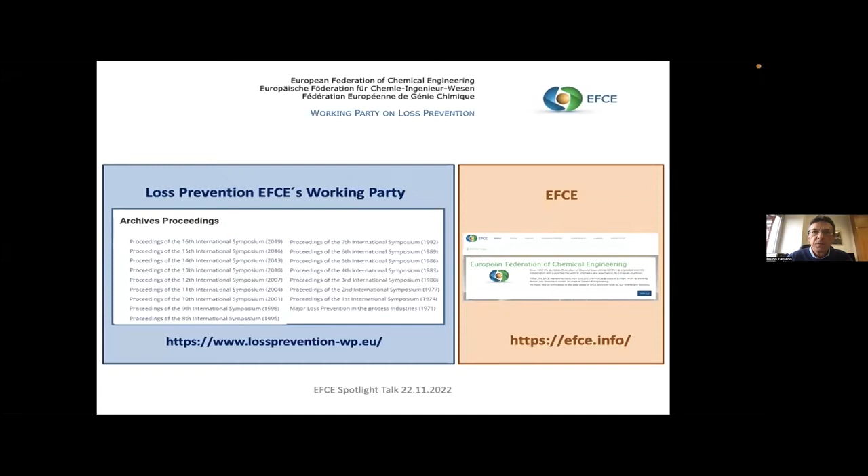Why? Well, first of all, energy is the engine that underpins an economy, and we are going towards an unprecedented energy transformation. This topic represents an emerging facet of the safety and loss prevention domain. And at the last Prague Symposium, which was in June 2022, it was very appealing for delegates as new challenges in our rapidly evolving risk world.

In fact, we all know that we have to face new challenges, and indeed we are in a sort of perfect storm where 3 drivers play a determining role, namely digitalization, climate change, and energy transition. They provide significant opportunities to enhance process safety, but equally they require managing the connected risks. And the last years introduced 2 additional catalyst factors, the COVID pandemic and the Ukraine crisis, which sent shock waves through the sector and are likely to influence how we organize and manage our plants and business to be more resilient and support the deep decarbonization of the global energy system.

Now we can move to our webinar, and here you can see the program of this workshop, which collects worldwide international experts from academia, industry, and institution in the spirit of our loss prevention symposium of the Working Party. We shall have a single session, and each delegate will present a topic, and here you have an outline, and after each speech, we shall have a question and answers slot. The lectures will focus on key issues in the energy transition area, hopefully enabling attendees to sample novel ideas and encourage cross-fertilization between specialist areas, because actually energy is a socio-technical system.

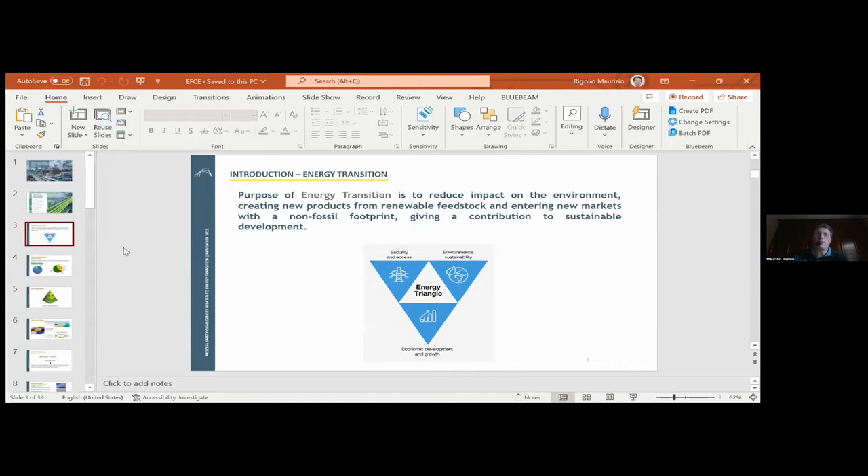We are discussing the energy triangle, and now we move to understanding what are the sources of CO2 emissions that are basically generated by energy and transport, and in some cases by industrial process and agriculture. But the main issue of greenhouse gas emissions, CO2 emissions in particular, are related to energy and transport.

So there is a need to make a sort of energy transition in order to move from the current use of energy through fossil fuels to other possible renewable sources of energy. This is the way in which NextChem, a company belonging to the Maire Tecnimont Group, is interpreting the energy transition requirement in a sort of pyramid, splitting the energy transition into three sectors: the green, the circular economy, and the so-called greening the brown.

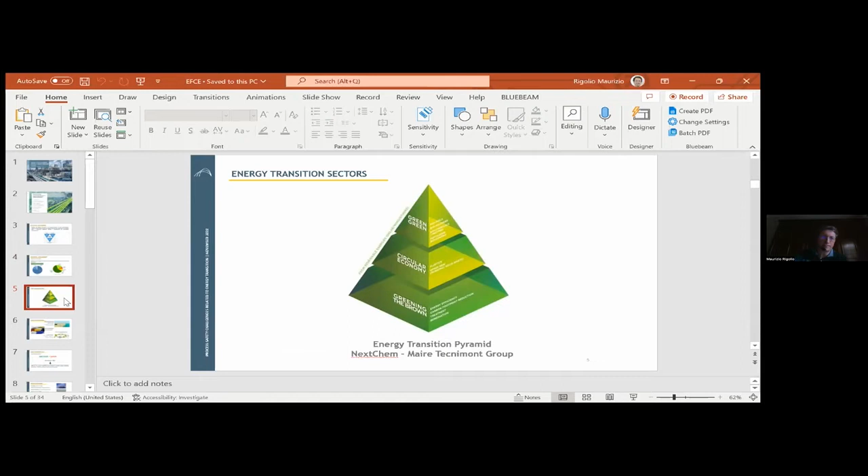Greening the brown is intended to optimize the use of energy with energy efficiency, decarbonization, carbon footprint reduction, and to use renewable energy and new energy carriers, like, for example, hydrogen from renewable sources.

The circular economy basically is related to mechanical recycling and waste-to-chemical plants. In the figures related to products generated by a plant of Tecnimont subsidiary MyReplast, which is completely making use of mechanical recycling in order to produce new bioplastic products.

The third sector, which is the green, is related to the production of fuels, polymers, chemicals, fertilizers, and coatings starting from bio-based products. This is how our group is interpreting the energy transition approach.

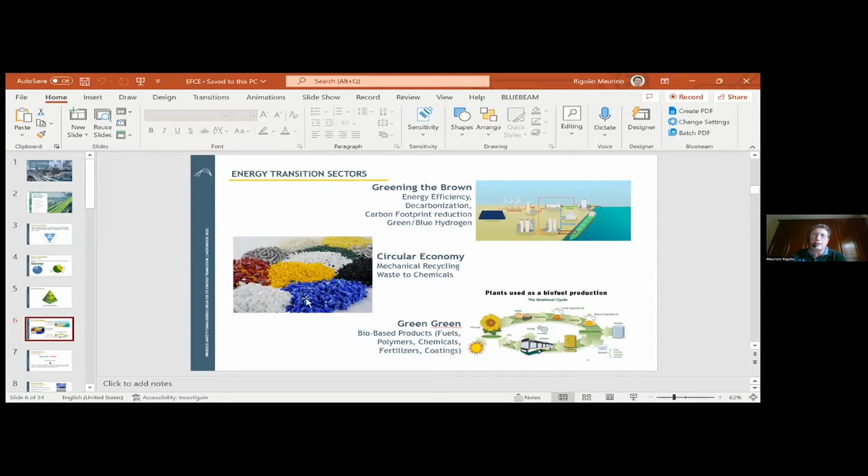But what is the criticality? What can be the criticality with respect to new hazards generated from the energy transition? The common perception is that greener is equal to safer, but this is not always true, because while it is correct that the high hazard related to the management of fossil fuels could in several cases be reduced, at the same time flammable fluids could still be present in several energy transition sectors, and in some cases there is also the introduction of new sources of hazard.

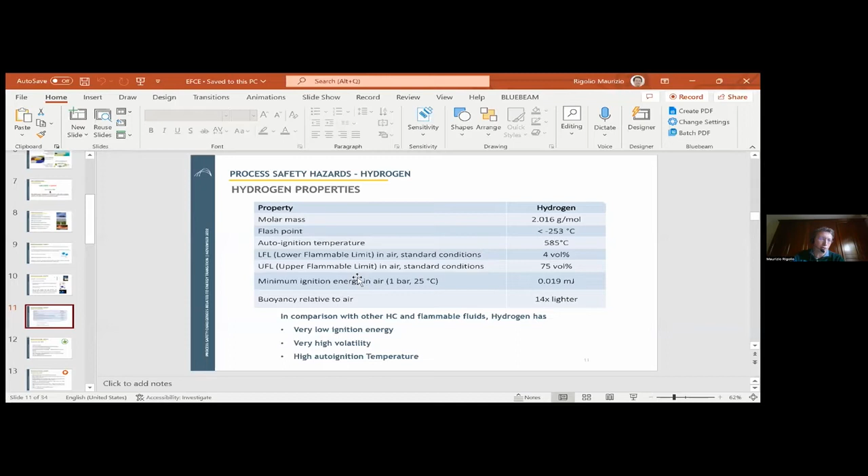Comparing with other hydrocarbons and flammable fluids, hydrogen has a very low ignition energy, a very high volatility, and a high autoignition temperature. Summarizing, the good news of hydrogen is that it's a non-toxic substance and is non-noxious for the atmosphere. It is not polluting for liquids, and it generates no solid waste.

It's a light gas, which means that in open and ventilated areas it disperses very rapidly. It burns quickly with a flame which has low radiance, but on the other hand the flame is invisible and has a high temperature. In outdoor open areas it has a low risk of explosion.

On the other side, what are the bad news? It is odorless and colorless, meaning it's undetectable by human senses. It's very easy to ignite, as we told before, due to the large inflammability domain and the very low ignition energy. There are a lot of potential ignition sources like static electricity, metal fracture, friction, vehicle exhaust.

The explosion in closed and congested environments might have very heavy consequences because the phenomenon of transition from deflagration to detonation could be generated. It is highly reactive. The combustion releases much more energy than other gases, and in case of confined space it can generate very important overpressure.

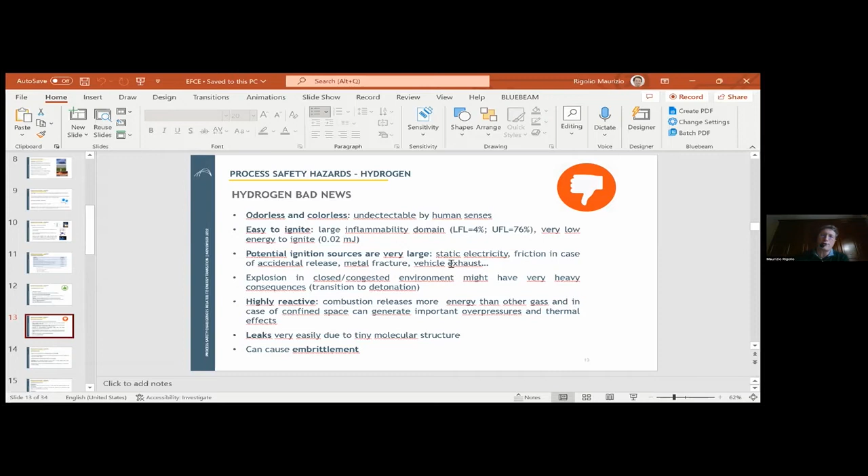It leaks very easily due to its tiny molecular structure, and for this reason it can cause embrittlement.

The typical process safety hazard related to the ignition of hydrogen is the jet fire. The flame emits predominantly radiation in the UV region and very little in the visible region, so hydrogen flames are difficult to see in daylight. The burning velocity is very high, 8 times higher than other hydrocarbons. This high burning velocity can increase the frequency of transition from deflagration to detonation.

The explosion of hydrogen in some cases starts with deflagration, meaning lower than the speed of sound, with a propagation velocity less than 100 meters per second, and with very low overpressure. In case of transition to detonation, the subsonic flame can accelerate and become supersonic. It occurs most often when there is turbulence of flames and when the fire explosion scenario is partially confined and obstructed.

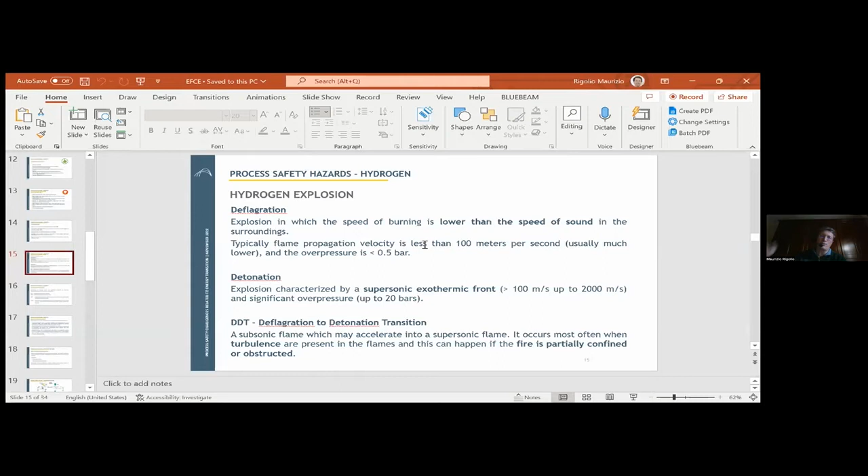In this case, the deflagration transfers to detonation, which means supersonic exothermic fronts at more than 100 meters per second, up to 2000 meters per second, with very significant overpressure, up to 20 bar G, and therefore with some catastrophic damage.

Apart from fire and explosion, the third very critical process safety hazard for hydrogen is embrittlement. Embrittlement is the penetration of hydrogen inside the crystalline structure of materials. It can be classified basically in two categories: the real embrittlement, called HEC, embrittlement cracking, which is a degradation with time of the mechanical properties.

Due to permeation of hydrogen inside the materials, and HTHA, the high temperature hydrogen attack. That means when hydrogen is handled at high temperature, the hydrogen can dissolve inside the steel, and the reaction with the dissolved carbon can form methane, causing fissures and cracking.

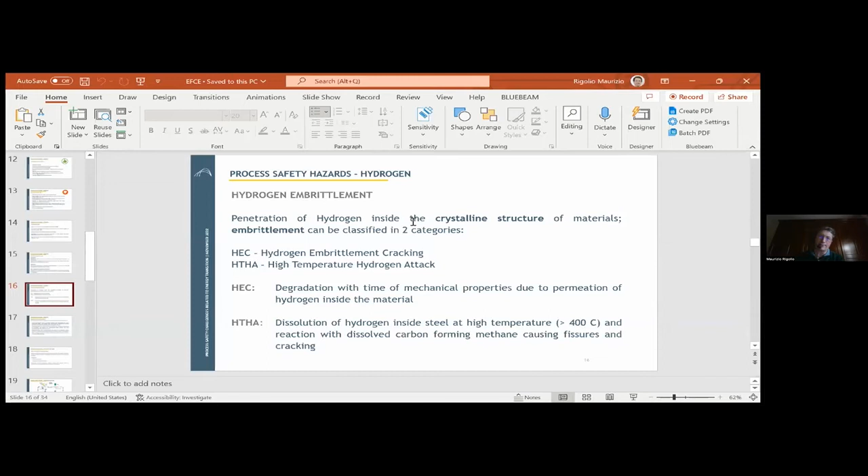So from a process design point of view, what are the most critical scenarios to consider while designing a hydrogen plant? First of all, it is recommended to avoid closed environments, because due to hydrogen volatility and accumulation on the environment ceiling, the closed room has a significant risk of fire and explosion. When feasible, the closed room should be replaced with a shelter structure with the maximum possible provision of openings towards the top, in order to let hydrogen dissolve in the atmosphere.

Another process safety design aspect to take into account is material selection. Due to embrittlement, the selection of material shall be investigated with very specific care, considering the pressures and cyclic conditions involved. At low pressure, it has been demonstrated that some non-metal materials, like GRP and FRP, are much less sensitive to embrittlement than steels, for which the only material considered suitable for hydrogen is stainless steel.

Of course, if the pressure increases, the non-metal material cannot be used, because they cannot withstand high pressure.

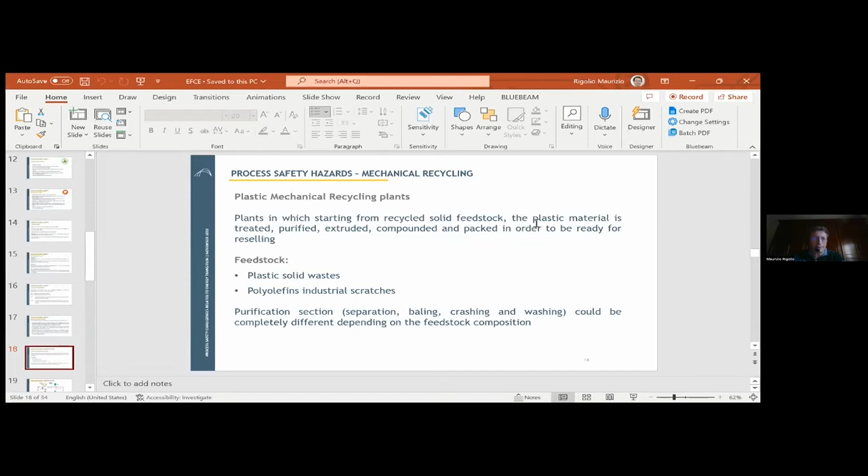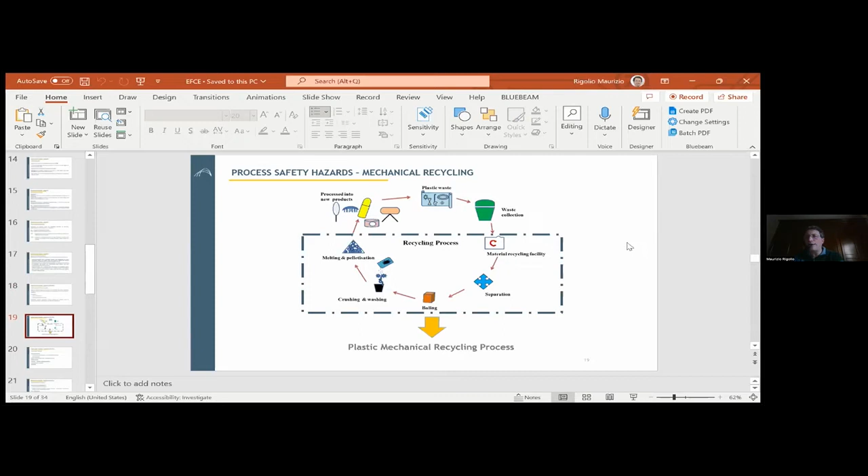According to the composition of the feedstock, the purification section can be quite different. The process of mechanical recycling starts from waste collection up to collection in a material recycling facility, separation, compacting and baling, crushing, washing, melting, extruding, pelletization, and processing of new products. Starting from the collection in a material recycling facility up to the pelletization is the so-called recycling process that is generated in a single facility.

What are the hazardous sources of a mechanical recycling plant? First of all, combustible dust, in some cases related to plastic particles with granulometry less than 25 microns. But there can also be some dusty additives added during pelletizing in order to increase the properties of the recycled plastic material. There could also be some waste in a plastic mechanical recycling plant.

There are some battery rooms, forklifts, vehicle recharging stations, combustible oil, grease, and peroxide. So some hazardous substances are present.

The main hazardous scenario is generated from the dust, basically, in particular in closed, congested environments with some potential ignition sources which are part of the process itself, like rotating components, electrostatic charge, friction, and in some cases high temperature, a dust explosion can be generated.

Dust and waste fires can also generate high fire loads because in this kind of plant there are very huge storage areas, and from flammable combustible fluids and batteries, fire can be generated. If peroxide is used as an additive, also the composition of the peroxide shall be taken into account.

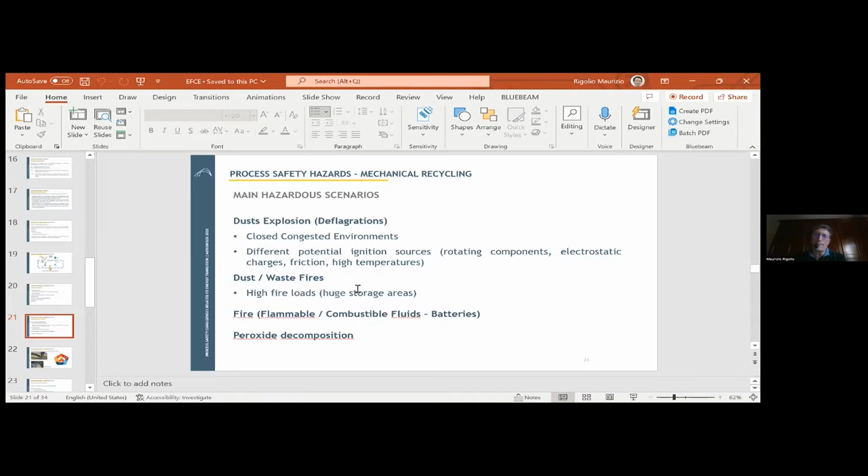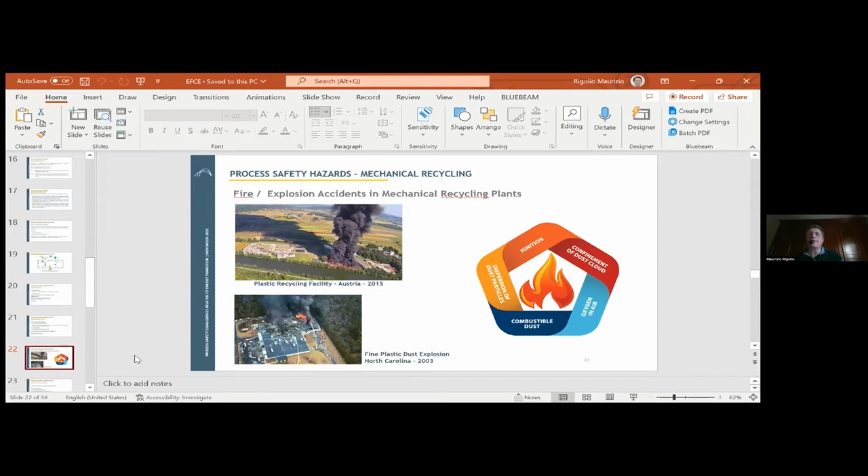In this picture, there are two examples of plastic recycling facility fire. As you can see, the fire can be very huge, because if it happens in a congested area, all five elements of the dust explosion pentagon can be present: oxygen, ignition, dispersion of dust particles, presence of dust, and if the dust cloud is confined, an explosion could be generated.

In order to assess the dust fire and explosion scenario, the following properties shall be taken into account: the granulometry, the minimum ignition energy and minimum ignition temperature of the dust cloud, the self-ignition temperature of a layer, the minimum explosive concentration, the maximum pressure of dust explosion, and the explosion constant, which is a function of maximum pressure and time, typical of each dust.

The problem is that these kinds of properties are not easy to determine, and can be determined only with tests specific for the kind of dust, especially in case of plastic recycling plants, because the treated dust is really a mixture of different kinds of raw materials. So the only way to find these properties is to make particular and specific tests.

The profile of a dust deflagration is a very wide increase of pressure up to a certain period of time, generating a level called Pmax, the maximum pressure at that time. After that, the pressure slightly decreases. The specific constant of each dust can be generated by the difference between the pressure and the time required to reach this pressure. So the level of Pmax is specific to each kind of dust.

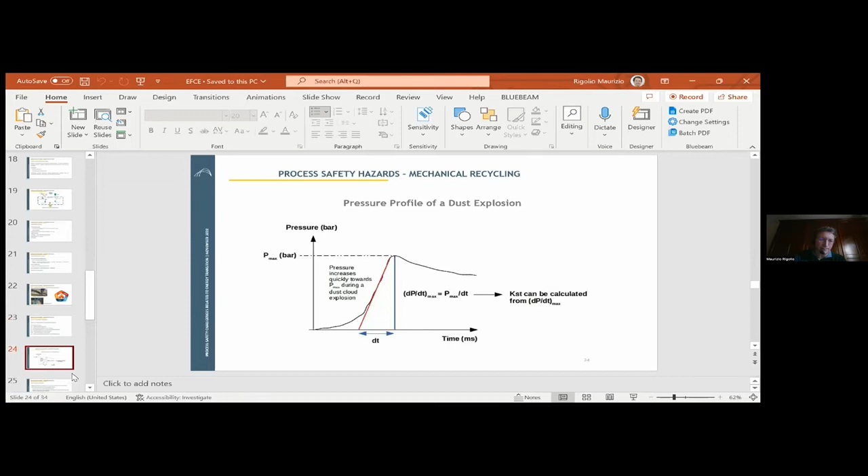It is not easy to simulate a dust explosion in order to find what mitigation measures could be applied, because Lagrangian models are not adequate to evaluate such consequences. Therefore, a CFD code is required.

To run a CFD code, geometrical volumes shall be known. The turbulent flow of dust layers in some cases cannot be modeled properly, since the dust is modeled as a very dense gas, and it must be taken into account that the dust combustion process is rarely completed. There is also a fraction of non-reacting dust which has to be estimated by assumption. So in several cases, it's not possible to properly model a dust explosion, and the mitigation measures are therefore based on experience, existing guidelines, standards, and/or literature data.

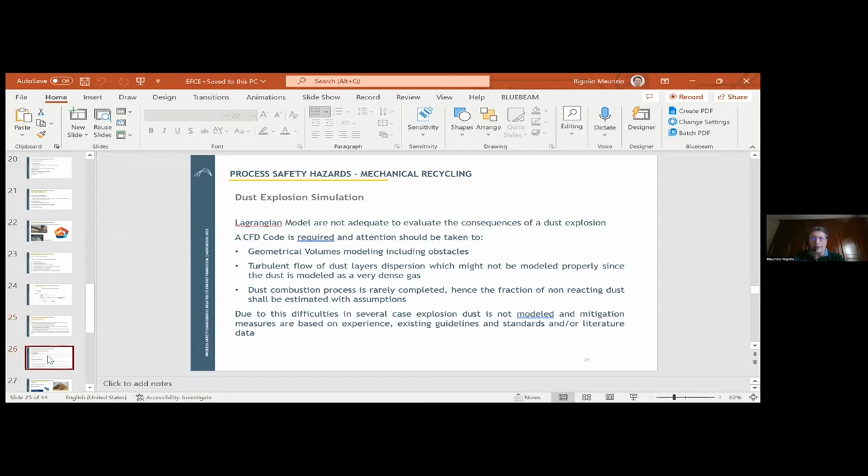What are the basic mitigation measures against potential dust explosion and fire scenarios? For sure, fire segregation, with fire rated walls provided to segregate the closest area where a potential source of fire may be present, selecting the rating according to the fire load. For waste storage areas, a higher fire rating is typically required than what is required in process buildings.

Dust explosion protection has to be mitigated with the provision of explosion panels for equipment handling combustible dust. In this case, it's not about prevention of the explosion, but mitigation by providing relief panels and explosion panels in the equipment, and relief panels along the walls, in order to let the dust explosion have a way of escape without completely destroying the building.

And of course, a classification of zone 20, zone 21, and zone 22 in accordance with determined hazardous areas, suitable for the auto-ignition temperature of the dust, in order to minimize the source of ignition.

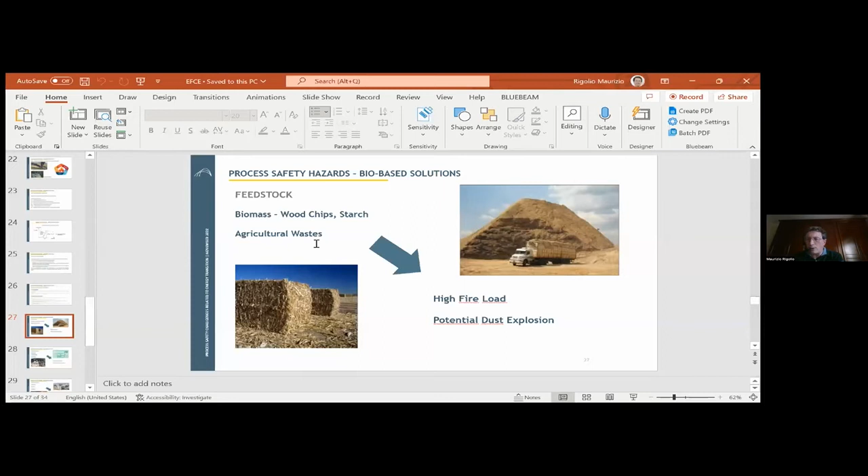The third example is related to bio-based solutions, which in some cases have the same criticality as dust. The feedstock from which we normally start in a bio-based process is the biomass - wood chips, starch, hay, agricultural waste, and similar materials. This kind of feedstock has a high fire load and can generate potential dust explosions.

In the intermediate process, which typically consists of hydrolysis, fermentation, and distillation, there are chemical reactions that in some cases are exothermic and can generate runaway reactions. Also, potential fire and explosion can be generated by the intermediate products, which in several cases are combustible. So all the safeguards related to a standard plant shall be taken into account.

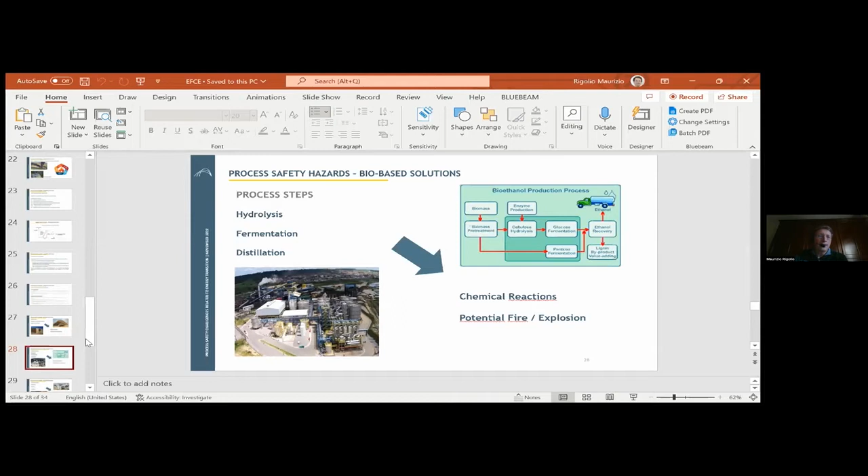The final product of the bio-based solution is typically biodiesel, ethanol, and solvents, and all these products are flammable fluids, exactly like those generated by a fossil fuel plant. So the storage area for this kind of fluid has to be protected against fire and explosion, and potential fire from these products shall be considered and mitigated.

From this kind of hazard that we have identified, what could be the real risk that we are taking into account?

The main risk is due to the fact that these process safety hazards are often happening in a context which is not the standard high hazard industrial context regulated by the Seveso III directive and related standards. We transfer high hazard risk into facilities not used to handle such risk, because they are not regulated by Seveso III, and in some cases, especially for hydrogen, these could even be non-industrial but civil facilities.

So how can we, as process safety experts, act against this hazard transferred into a new context? For sure, we have to start from training. We have to provide future managers, developers and operators of this kind of plant a specific technical and behavioral training regarding HSE and process safety.

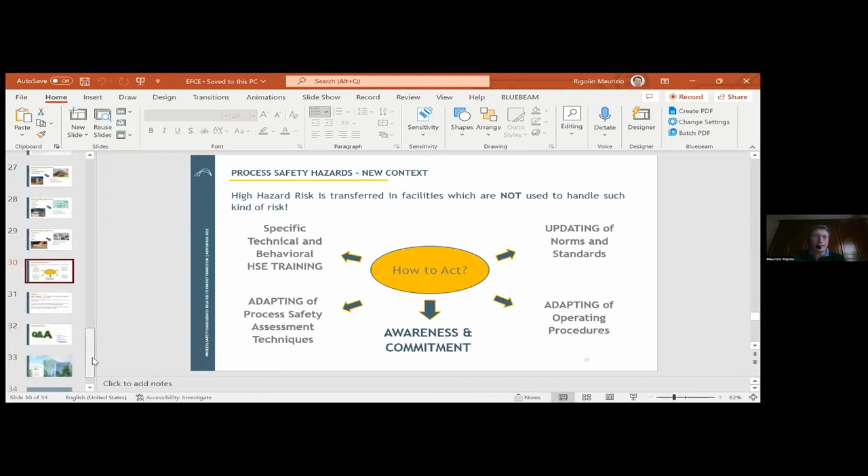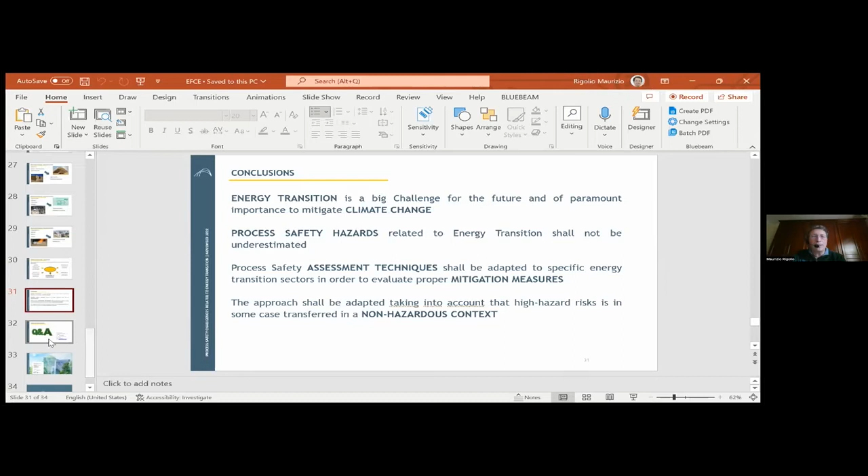I come therefore to the conclusion. Energy transition is for sure a big challenge for the future and of paramount importance to mitigate climate change. We must not underestimate the process safety hazards related to energy transition. We have to study proper safety assessment techniques adapted to the specific energy transition sector in order to properly evaluate mitigation measures. And we have to use an approach that takes into account that high hazard risk is, in some cases, transferred into a non-hazardous context. I have concluded my speech and I leave the space to any questions you may have.

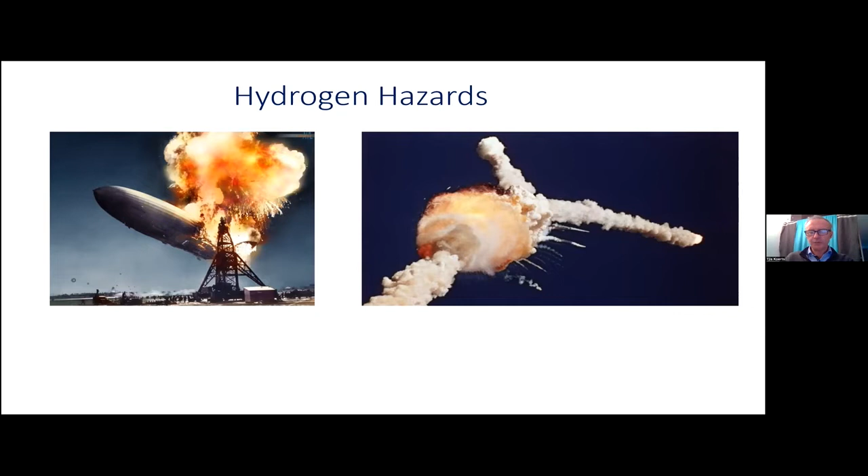And we still have to learn in the energy transition about new hazards, and one of them is working with hydrogen.

So that's the first thing - it's a hazard, you can't see a fire during daytime, but there are solutions you can implement to learn to work with this and to easily get alarmed about hydrogen fires.

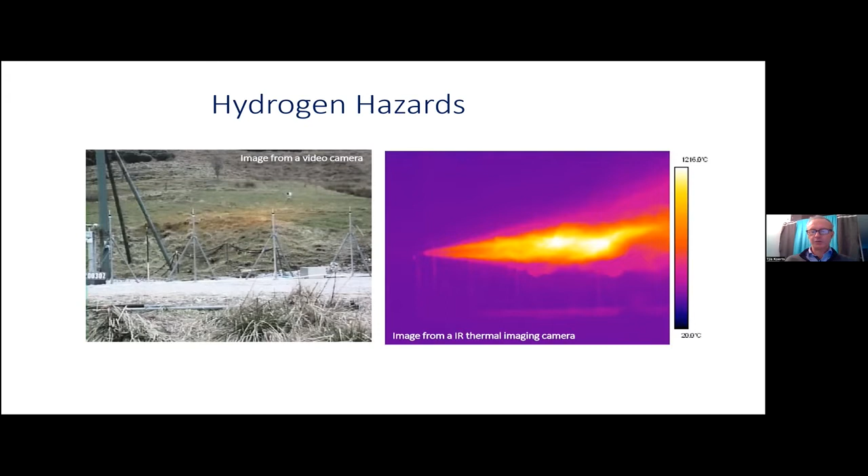The other challenge is reactivity with hydrogen. If we go from natural gas to hydrogen, especially in the UK, many studies have been done. There are two aspects. The first is that the hydrogen molecule is much smaller than natural gas, and its ignition energy is an order of magnitude smaller. Natural gas is a relatively stable molecule that isn't easy to get reacting with oxygen - you need quite a bit of energy to start it. Hydrogen only needs a very little energy to get started. So that's a major challenge if you put hydrogen into a natural gas network and you leak a little bit of hydrogen - the likelihood of ignition is completely different.

The other aspect of hydrogen is its high reactivity. Especially in industry, what are we afraid of? A gas explosion we typically survive, but a detonation is what we're really afraid of. If we have detonations, you get overpressures of 10 bars, and you cannot design for a detonation - it blasts your building away and you cannot stop that. Unfortunately, hydrogen will more easily create a detonation than natural gas, and that has been proven now. So that's something we need to start living with, and it requires some thinking in design - especially it might require higher standards to avoid leakages with hydrogen versus what we have these days with natural gas. Those are the two things the previous speaker also indicated.

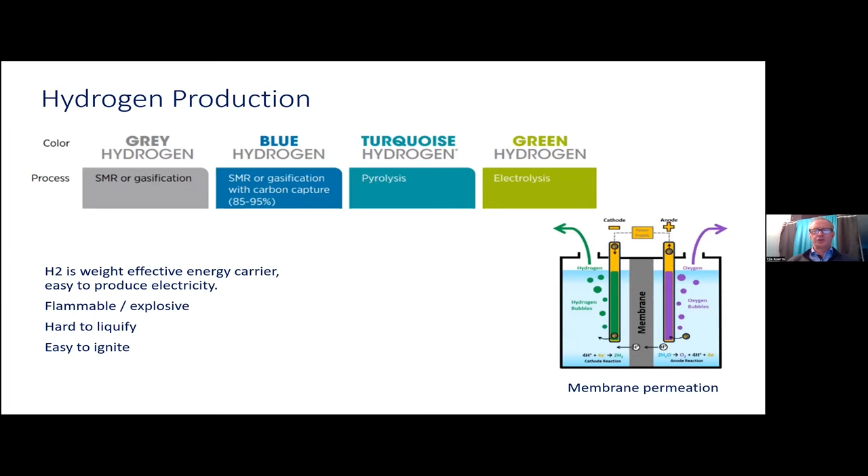So what we could do, instead of liquefying hydrogen directly, is transform it into ammonia, transport the ammonia, and then create the hydrogen out of the ammonia back. That's technology which is getting readily available now, and yes, we can do that. Of course, the hazard there is ammonia is toxic, and especially if we do this at large scale, you need to stay away from the areas where you store this toxic ammonia. So that will be an issue.

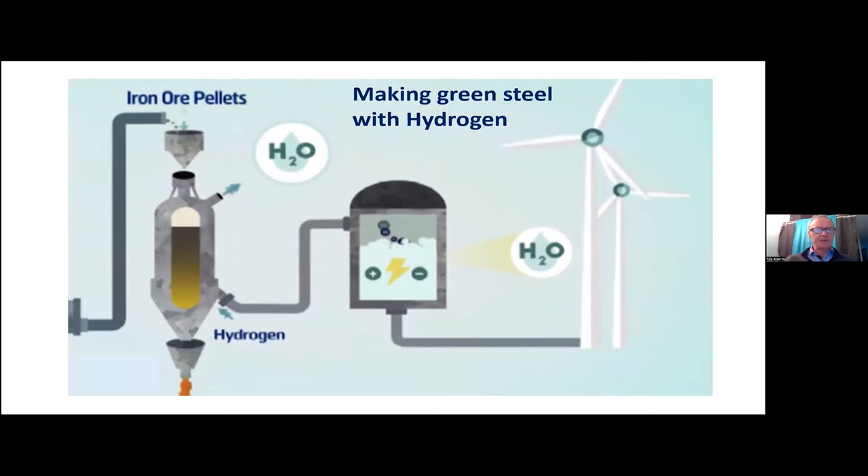Another way of doing this these days is creating blue ammonia. So we get a lot of oil and gas from the Middle East, and these guys are willing to say, hey, if you don't want the carbon and just want the hydrogen from us, we can deliver that. We can take the natural gas, take the hydrogen out of it, convert the hydrogen towards ammonia, liquefy the ammonia, and put that in a vessel and ship it to you. Then the ship that arrives is not carrying crude, but liquid ammonia. You can store the liquid ammonia and get the hydrogen out of it.

Basically, this means we can start this hydrogen economy pretty fast. In the meantime, Saudi Arabia will put the CO2 they produce under the ground, and from there on you'd have at least a closed loop. Sure, not fully decarbonized yet, but if we want to start today and make a big step towards decarbonization, at least not putting CO2 in the air, we can make those steps. That's a big transition. There will be some cost involved, but we can do it if we want.

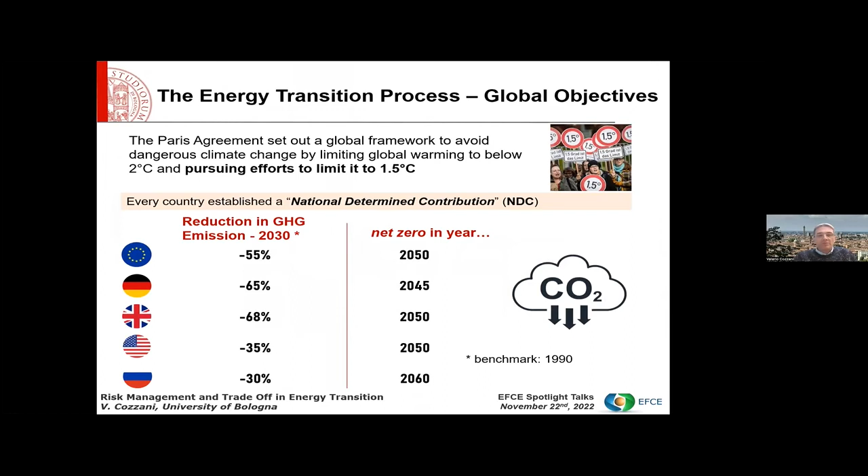Concerning the first point, we have clearly in mind the problems that lead the energy transition process and the decarbonization of industry. In this framework, it is very important to address the shift from conventional fossil fuels to renewable energy. In the future, there will not be a single type of renewable energy exploited, but rather a combination of a number of different energy sources. This makes the landscape of energy production more critical.

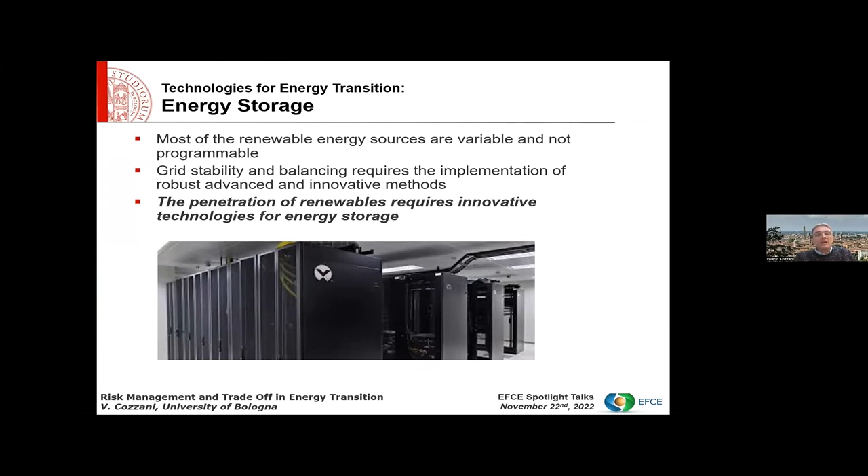It should be remarked that the main difference in this transition is that renewable energy sources are variable and not programmable. That means that grid stability requires the implementation of advanced and innovative methods, and that the penetration of renewables requires technologies for energy storage. Now, beside batteries, one of the more attractive types of procedures and technologies for the storage of energy is the conversion of electric energy to chemical vectors.

This is sometimes called chemical storage, but when these energy vectors are not converted back into electric energy, but rather directly used, we usually call these processes power to X, power to gas, or power to liquid. In this framework, there are a number of technologies addressing the possible production of methanol, ammonia, hydrogen, and other types of energy vectors.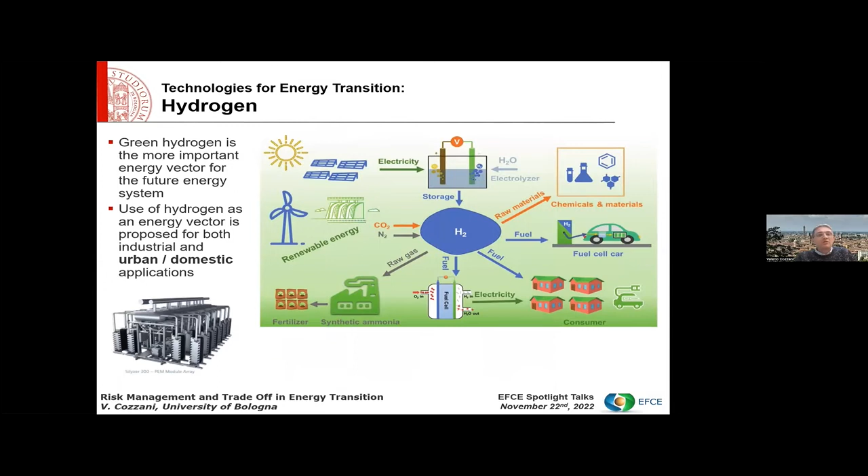As mentioned by the previous speaker, hydrogen is for sure the most popular, and it's proposed both for urban but also for domestic applications, not only for industrial applications. The other type of attractive energy vector with a high technology readiness level is ammonia, which is proposed especially for long-range transportation and ships.

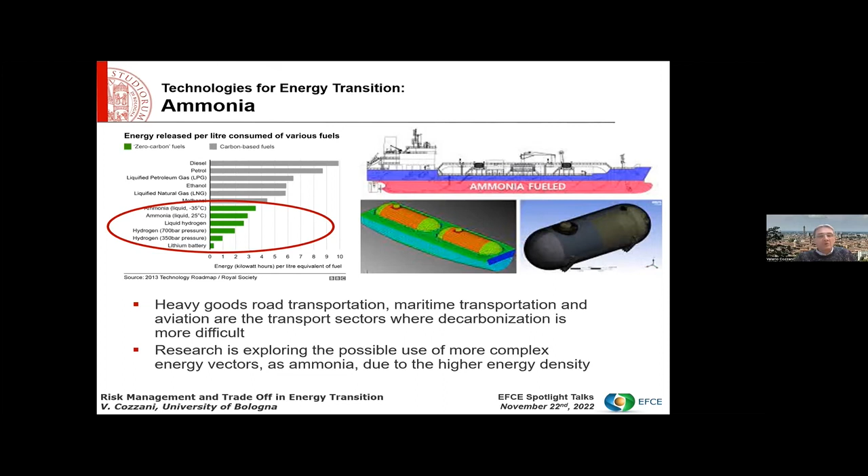It is also important to remark that this change in the landscape of energy and this use of chemical energy vectors like hydrogen, ammonia, methanol, and others is not only a matter of industry. Meeting the carbon dioxide emission reduction objectives actually requires the decarbonization of domestic applications as well, and of private transportation. So we are all concerned personally on the one hand. On the other hand, it is important to remark that this transition will not take place only in industry, but rather will change our residential areas, our infrastructure, our public transportation, our buses, trains, ships, and so on.

This causes a big and important difference when coming to the issue of safety, and also, by the way, of technology more in general. We have a huge operating experience with hydrogen and ammonia. However, all this operating experience, dating for several decades, is mostly limited to industrial use. Now, when you are in industry, you have trained operators, clearance areas, limits to simultaneous operations allowed on site, and implementation of specific technical standards such as ATEX, for example, which will limit the ignition sources.

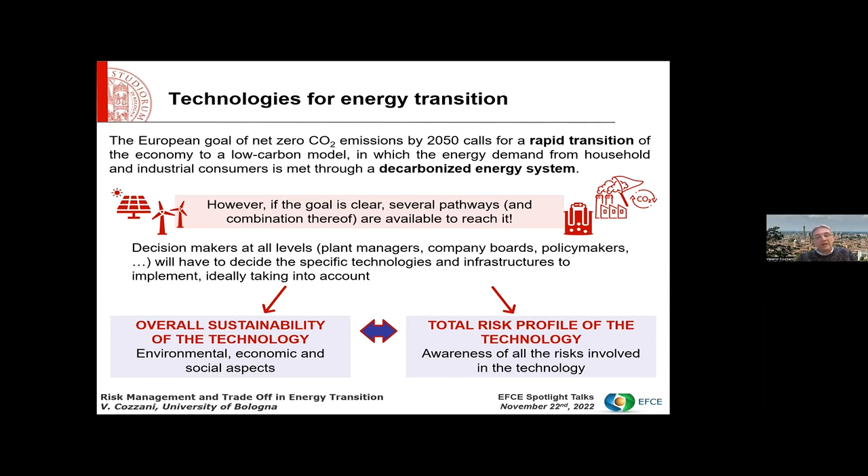Safety of energy technologies is actually a key requirement for their societal acceptability. As an example, in Europe, we are complaining now that we face a shortage of natural gas, and that we don't have enough regasification capacity. But we must recall the huge societal opposition that the installation of new regasification plants faced, especially in Italy, but also in other European countries. So if we want to implement an energy technology, we need to grant societal acceptability, and this is based on the safety scores of the energy technology.

Now, when dealing with fossil fuels, we have, unfortunately, hundreds of sad stories and severe accidents taking place not in industrial areas, but in residential areas. Here I have a couple of examples: one in Belgium in 2004, concerning a natural gas pipeline that was cut during excavation works. And another example in Viareggio, Italy, in 2009, where an LPG freight train derailed outside a railway station, and an LPG cloud spread over houses, causing several tens of fatalities. So this is the current situation with fossil fuels.

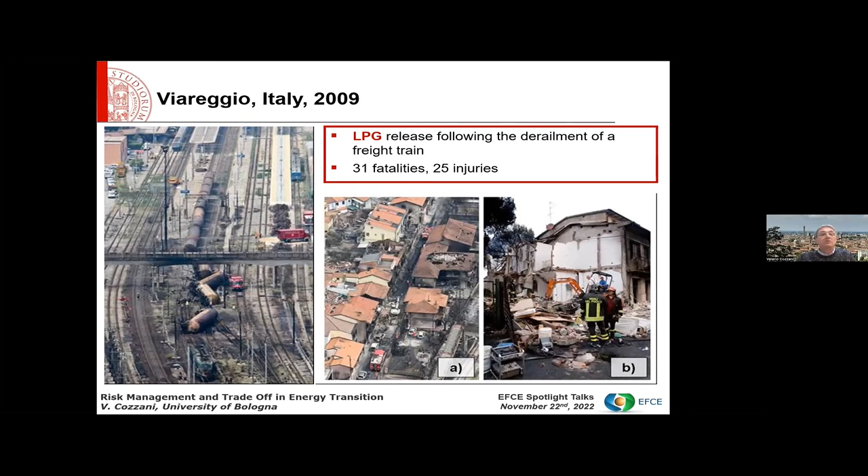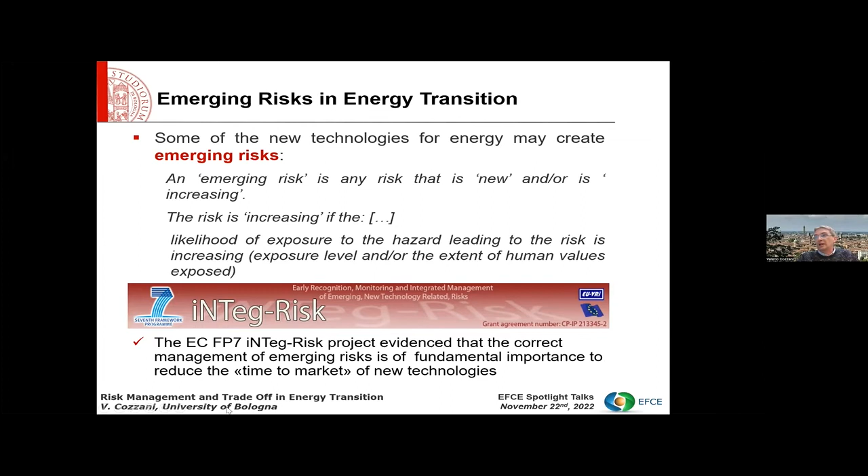What about the future situation? In the future, it should be remarked that some new energy technologies may create what are called emerging risks. Emerging risk is technically a new risk, but this is not quite the case here, but rather what is happening is an increasing risk in this definition. That is, the likelihood of exposure to the hazard leading to the risk is increasing due to the foreseen spread of new energy technologies, and in particular the exposure of people in urban and residential areas to the hazard caused by these new energy vectors.

When this happened, there was even uncertainty by the emergency responders about what could be the safety distances and what could be the emergency intervention plan to put in place to mitigate the accident and stop the fire. As a result, the company involved withdrew from the hydrogen distribution business in Norway.

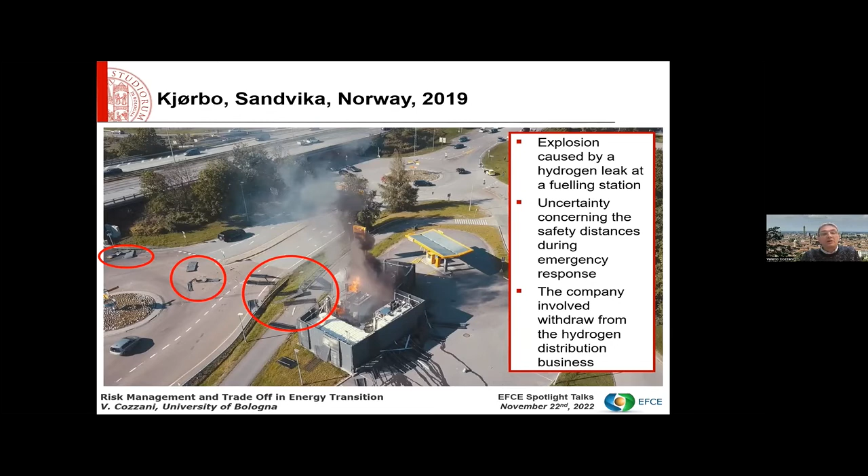So you can see how safety can interfere with business plans and with the implementation of these energy vectors. This means that safety can be a limit to the energy transition, or at least needs to be considered as an important factor driving the transition.

It is important to look at the safety perspective in the framework of risk trade-off. We are looking at this energy transition towards sustainable energy in the framework of risks caused by climate change, which we have on our forehand.

These risks are posed with respect to supply chains and economic activities in several countries. This was discussed in detail in the COP27 conference that ended these days in Egypt. But when implementing this transition towards renewable energy vectors and decarbonization, we need to consider the other risks that we are introducing. So there is a kind of trade-off.

That means we need to find a balance between the benefits and potential side effects in the domain of environmental risk, process safety, and occupational safety for the technologies we want to introduce in the framework of energy transition. If we take maritime transportation as an example...

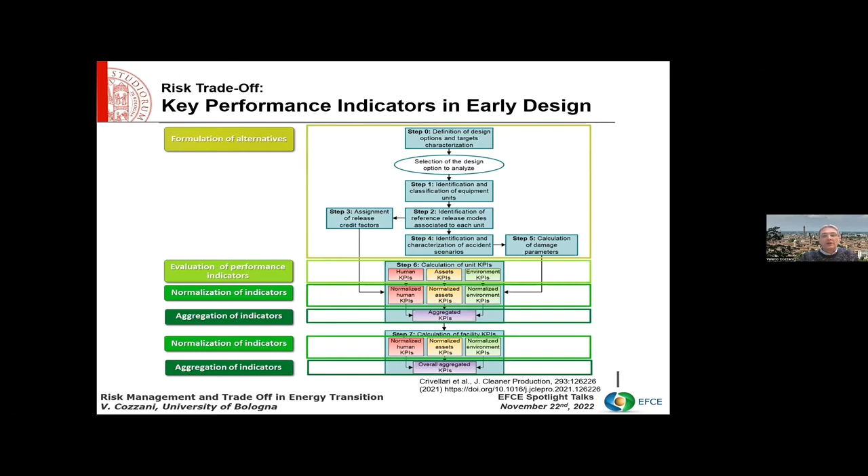Focusing on what's inside these procedures, there are usually models applied to the calculation of specific indicators. Here you have an example for the safety indicators, in order to assess some parameters representing the impact. In the case of safety, these are the damage distances and some credit factors for the accidents that may take place.

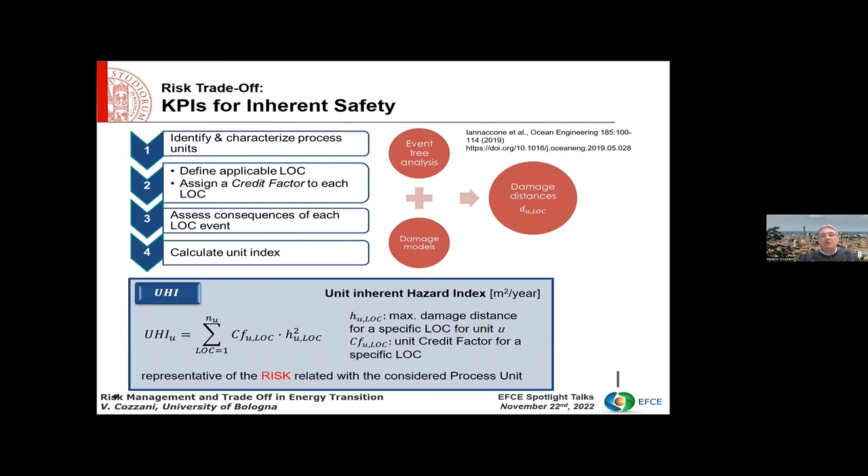When applying this framework to prospective technologies, you can get results that allow you to compare the performance of the technologies on specific issues, from the point of view of safety.

Here you have the results of inherent safety key performance indicators calculated for a boat, so boat transportation, where we tried to apply the different technologies proposed, implementing storage tanks having the same mass of fuel.

That means more or less that the boat will be able to run the same number of kilometers with the amount of fuel present in the tank.

When calculating the safety performance, this indicator provides you an impact indicator. The higher the indicator, the higher the risk associated with the technology.

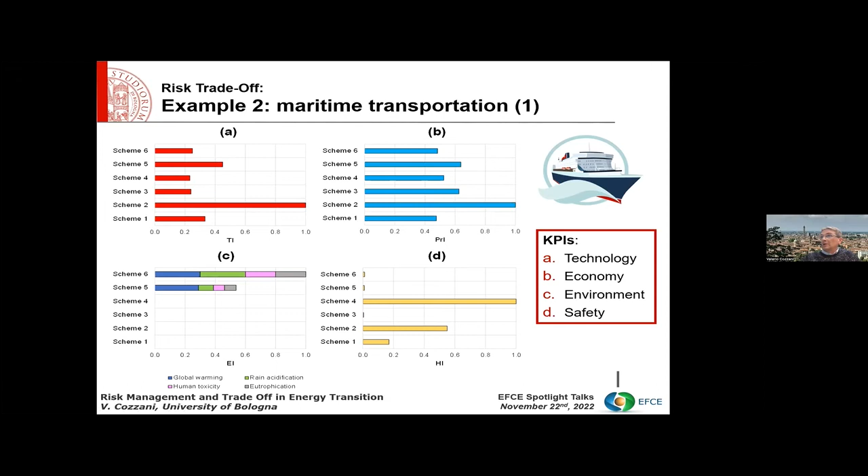That means the lower the value of the indicator, the best the technology performance. When you look at what comes out, focusing on the environmental impact and on the safety impact, you can see that fossil fuels - marine gas oil and liquefied natural gas - have definitely a much higher environmental impact than all the alternative fuels, in particular hydrogen and ammonia, that were supposed to be obtained from renewable energy sources. But still the risk detected by the inherent safety indicators with most of these technologies is much higher than the one from conventional fuels.

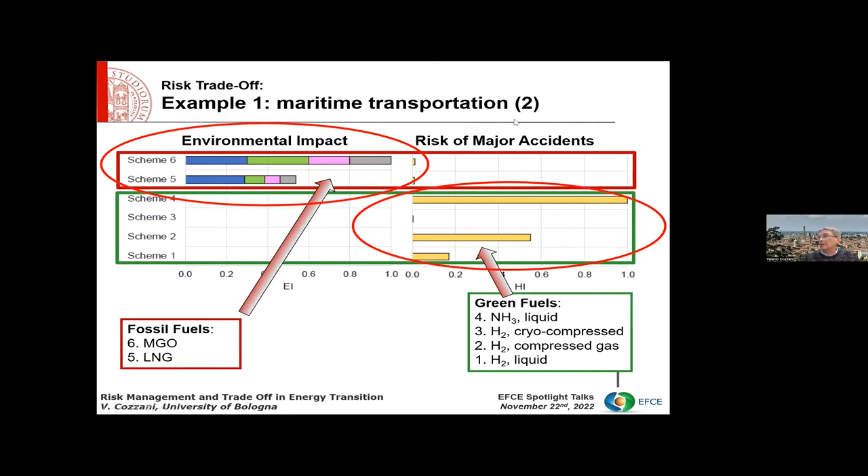So definitely what we are doing is operating a shift in the risk from the environmental compartment to safety when introducing these new technologies. So we need to govern, to balance this risk and to govern this transition, taking into account that this new risk is not inside an industrial site, but rather will be distributed in infrastructures. How can we cope with this problem?

Well, as I mentioned before, in the framework of energy transition, management of risk is complicated by a number of factors, such as the need to manage different types of risk, the transition time frame, and uncertainty due to the limited information available on the new technologies. So we need some strategic orientation and adequate decision support tools.

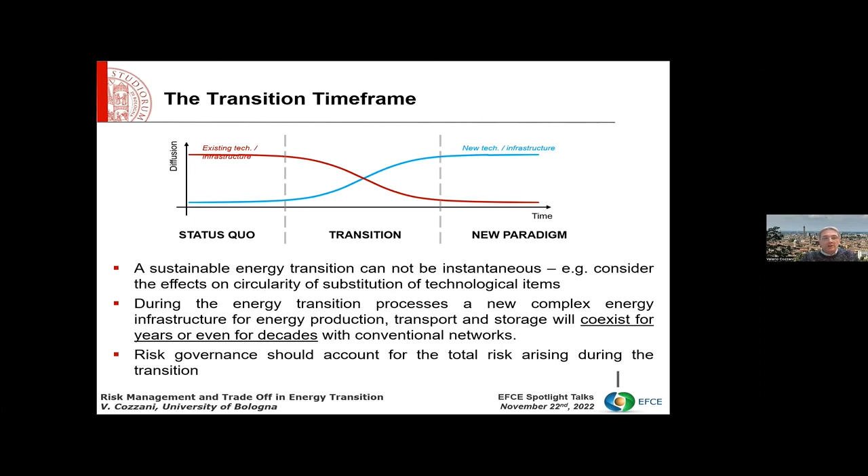Just to provide a few more details on what I was mentioning, you should consider that in perspective, we are facing a transition period in which the old infrastructure based on fossil fuel will coexist together with the new infrastructure. And this transition period, even in the more optimistic forecasts, will last a few decades.

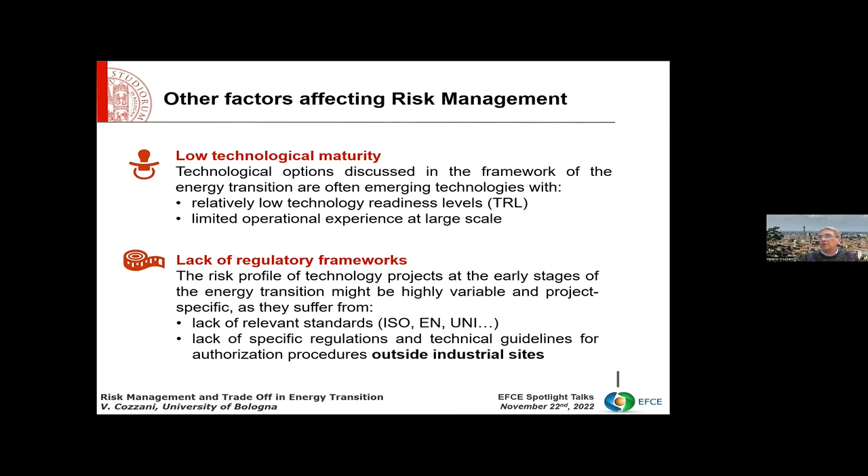We are also looking at solutions such as ammonia and hydrogen that have low technological maturity when applied to some specific applications, such as transportation or some new industrial applications pertaining to the decarbonization of industrial sectors. And finally, the regulatory frameworks which we have were built to regulate the use of these energy vectors in an industrial context. So we have a lack of specific regulations outside industrial sites, and this may be a problem in the authorization and implementation of new technologies.

In perspective, we can think that we can use some principles to develop the new networks that we expect will be required for energy vectors. Here I have reported the GAME principle - Globalement Au Moins Equivalent - a principle that has driven the implementation of the high-speed railway network in France, where each new technology implemented was required to have safety performance always equal or better than the technologies that were substituted or present in the former railway network. This principle can be of use when implementing new hydrogen networks, for example.

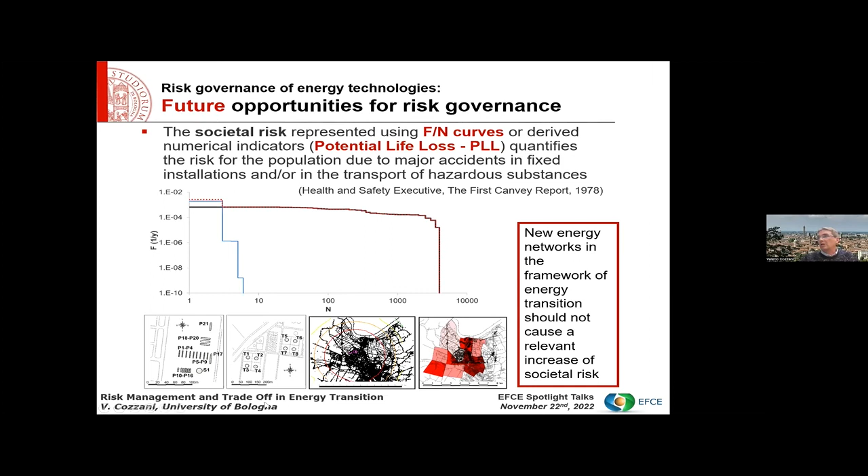At the same time, what we need to look at is the societal risk. We have indicators, such as the FN curve shown here, that are able to capture how in a local community there will be a risk to which the population is exposed due to multiple risk sources. Now, the implementation of a new network will cause an increase of the societal risk in this new landscape, this new framework. It is important to understand that this indicator will become crucial to warrant to local communities that the new energy framework will not come at the cost of an unsustainable or unacceptable risk for the population.

It is also important to mention that in this energy transition, we have the possibility to introduce a risk governance that will also be able to address new opportunities. In particular, if we build new energy infrastructure, we can implement principles for its adaptation to climate change, and we can implement Safety 4.0 principles - principles that may help enhance the safety of the digital technologies that will be associated with this new energy framework.

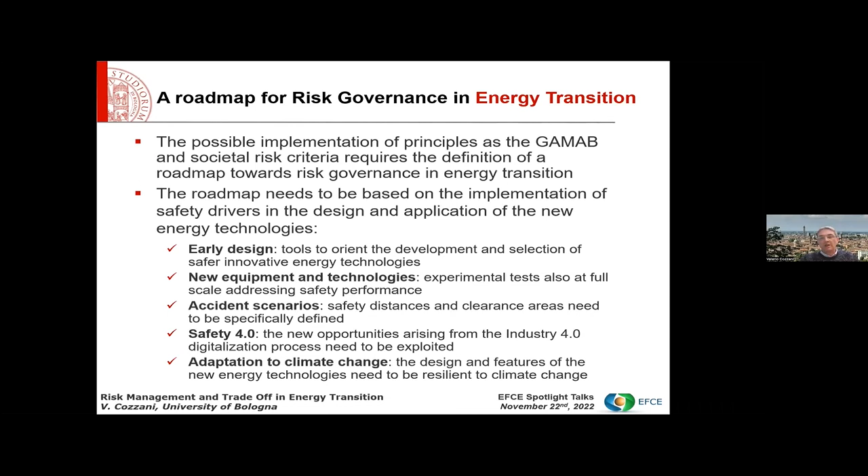Finally, coming to some conclusions: the energy transition and the diffusion of hydrogen and other energy vectors in urban and residential applications are expected to strongly influence the safety of workers and population, and may be a limit to the energy transition. So we need to implement appropriate risk governance in this energy transition process and to recognize and balance the risk trade-off from the environmental compartment to the societal compartment.

New knowledge and the rapid evolution of the regulatory framework are required to assure this safe transition. And if we are able to do this, we should also keep in mind that the energy transition is also an opportunity to develop and implement safer, more resilient, digitalized, sustainable energy technologies.

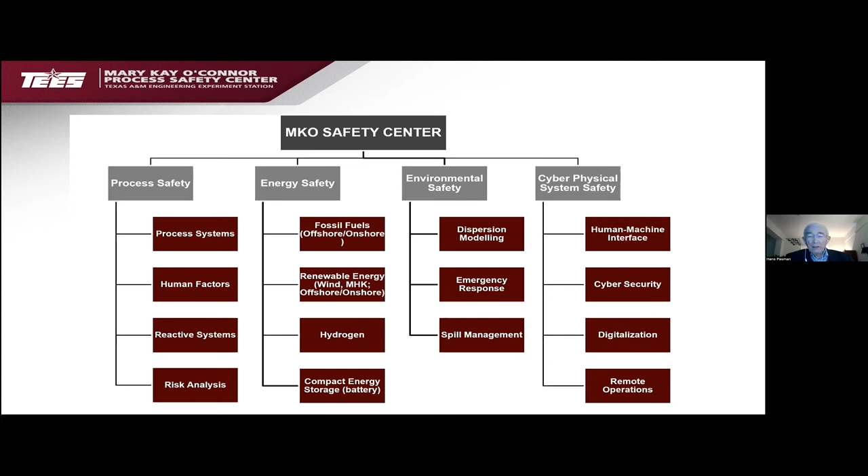That is again on hazard and risk. A lot of people are not very aware of the sharp difference that is there. Hazard is a potential, and it can be without a trigger, can stay there for ages. But risk is a combination of the consequence if that hazard unleashes, and the probability, likelihood that it could come, and that depends on a lot of conditions.

Then there is personal safety and process safety. Personal safety is, of course, also known under the name occupational safety. It is not all the way acute; it is also about permanent chronic toxicity, for instance if you are working in a certain environment. While process safety has to do with the safety of the socio-technical system, the plant, but also the organization and the people that are in that organization. So there is quite a difference, and in the past that did not always mean the process safety was given sufficient attention.

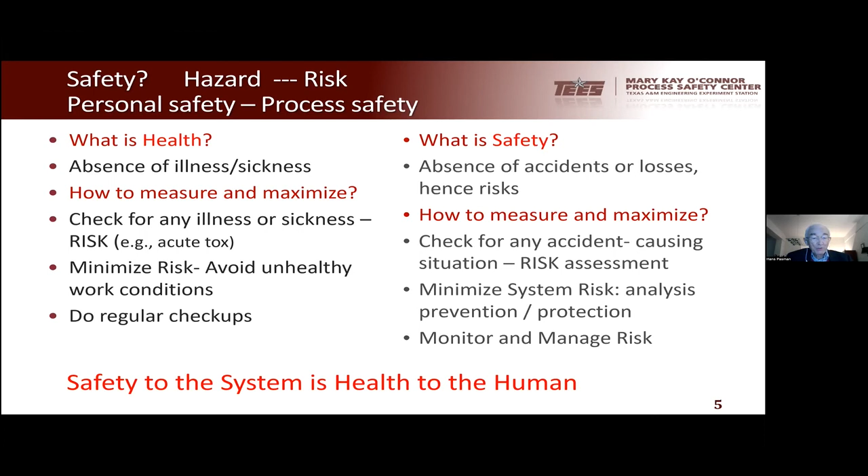That is in the digitalization age. There is an enormous development going on in dynamically following and seeing what risk we run. Safety to the system is health to the human, and that introduces the energy transition that Edison will treat. Please, Edison, go ahead.

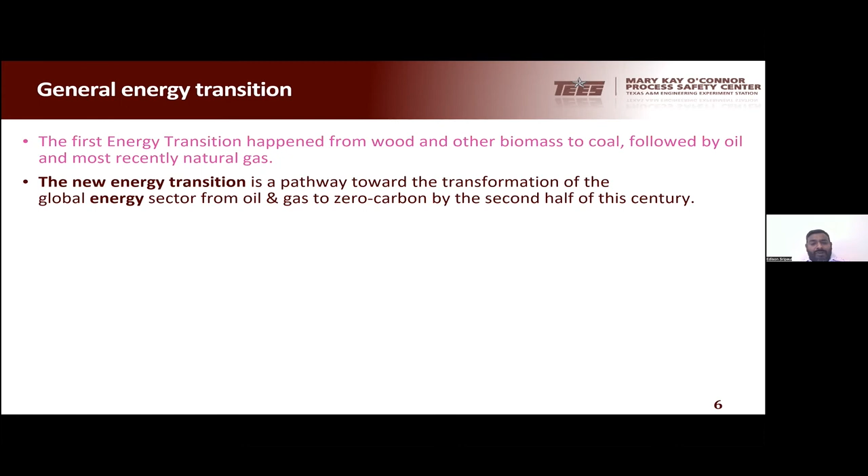During the Industrial Revolution, we saw the transition of energy from wood and other biomass to coal, and with the growing industrialization, we saw the advent of oil and natural gas taking over the whole industrial world. So with the Paris Accord and the net zero demands to be met in the next 50 years, we are looking for a new energy transition that will help us reach this.

Hydrogen is touted to be that next fuel that is going to help us reach that 2 degrees centigrade ceiling. So with the new urbanization, the consumer demand, and the need for green energy, we're looking at hydrogen to replace it. But when we get into that regime, what are the new safety hazards that we are looking at is the big question that needs to be answered.

With the new energy demand in terms of hydrogen, we are looking at large-scale electrolyzers in industrial scale. The large volume of hydrogen, and the production of oxygen in the same process, is going to be a simultaneous process where we are looking at new hazards and the capability of accidents that will actually impact the human population.

The other aspect of ensuring we reach net zero is through process electrification of the process plants, which essentially will help us mitigate the CO2 emission to the atmosphere. So essentially that will be one aspect that needs to be looked out to make sure that we reach the demands required by net zero.

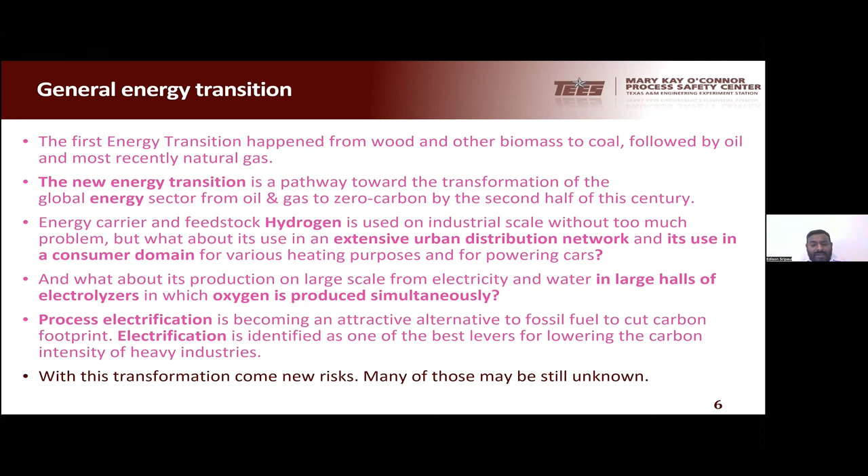With this new transformation in technology, we are looking at new risks, and as we are evolving, we are slowly finding out what are the risks that are coming out, and many are still yet to be found.

So if you look at hydrogen, we see it replacing the other conventional fuel. If you want to be green, then we're going to use renewable sources like wind and solar energy to power the electrolyzer, which will help us produce hydrogen.

That hydrogen, again, the energy that is produced has to be stored and has to be transported and used for the end users, like heating up buildings or powering our cars and automotives, and producing chemicals and fuel that are required for further use.

One sector that is largely looked at is transportation, or large-scale transportation like trucks, which will actually help us reach towards the goal of net zero. This is looking at one way of safely securing this whole process.

If we are to prevent any major catastrophe in a highly dense area, the whole production of green hydrogen is moved to offshore wind farms, where the wind energy supports the electrolyzer powering to produce hydrogen. Then it can be transported onshore to be used for consumption.

But then as we try to mitigate all the risk, it creates a new risk, which becomes the cyber threat, which we have seen in the last few years, where major companies have been threatened by cyber attacks and ransomware. So this is one thing that again has to be looked at before we even go into this direction.

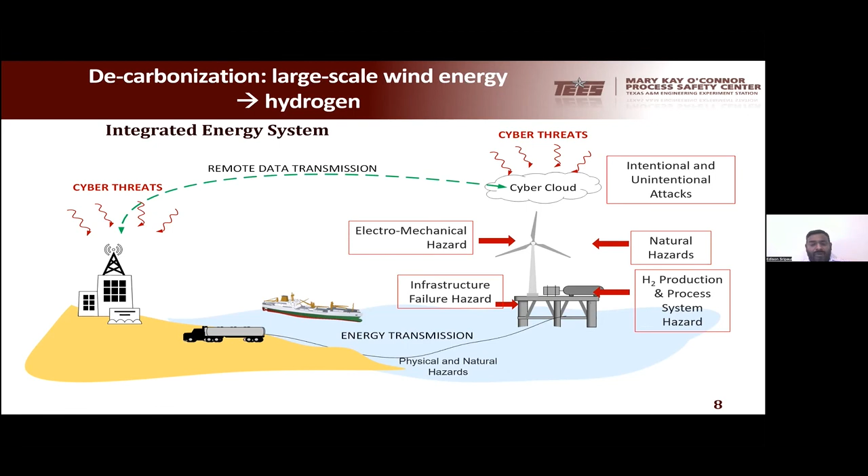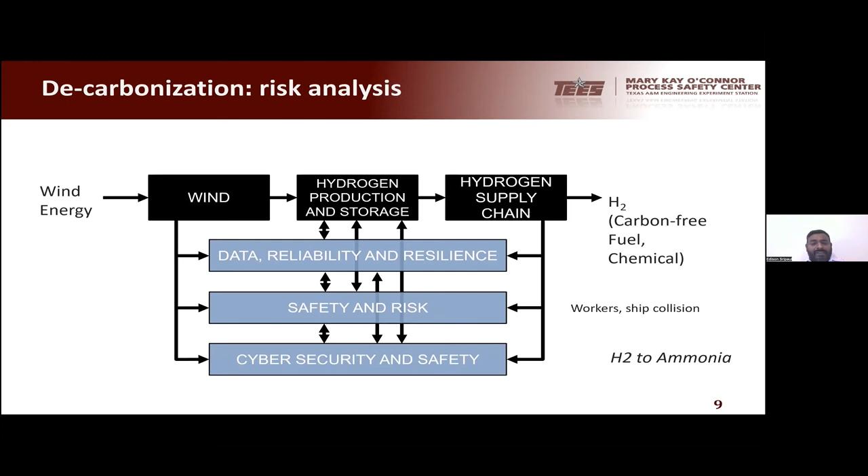Then we also have to look at the cybersecurity and safety aspect, because that oversees all these aspects, and make sure that this whole hydrogen production runs seamlessly without any issues. As we get into hydrogen production and then transportation, storage, and eventually end use of it, we're looking at different regulators coming into play, especially when it comes to vehicles.

But what needs to be seen is a big entity, or one entity, overseeing all these aspects to ensure there is uniformity and the ability to actually maintain this regulation when it transacts different aspects of the production, storage, and dispensing.

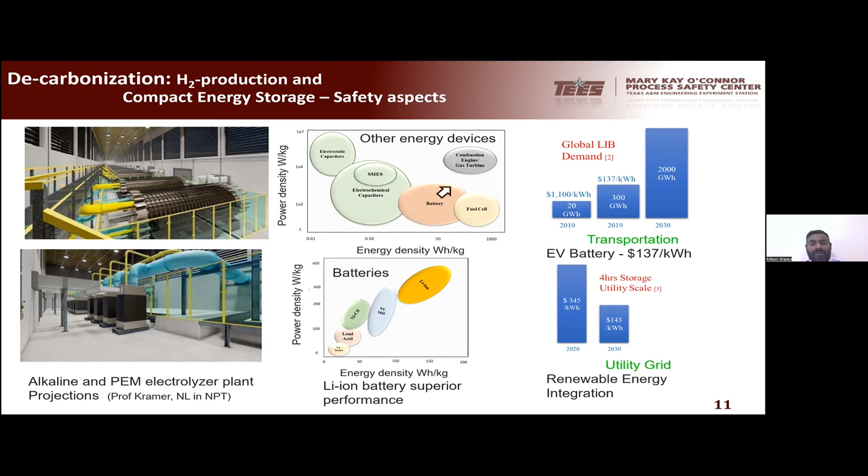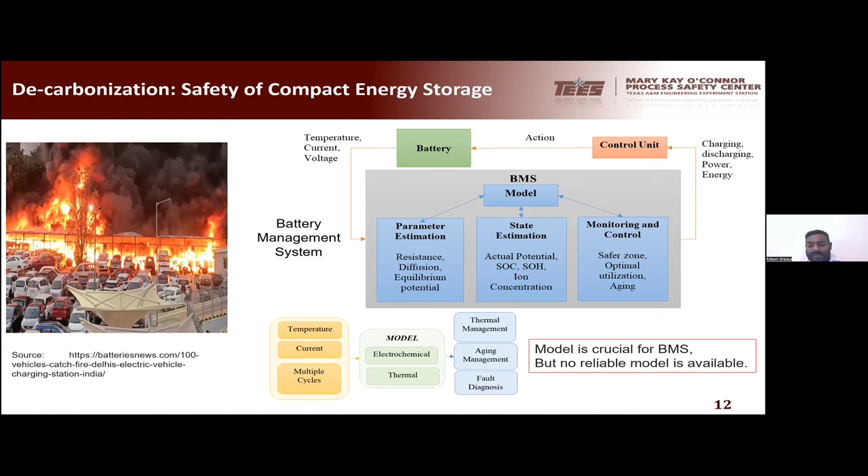And once they start the fire, we don't have a current protocol to put it out except to watch it burn down. Although we have the battery management system to model how batteries will be operated within safety limits during charging and discharging, due to the changing climate and other factors, we're still not able to ensure that they will operate within the safety limit.

As we move on, ammonia tends to be the next energy source that can help us reach the goals for net zero. It has emerged and has been in use in industry for a long time, but not at the large scale we expect to see in the next few decades.

Especially in the shipping industry, which is a major contributor to CO2 emissions, we're looking to replace it with ammonia. Green ammonia can be produced from renewable power and hydrogen to ensure we meet net zero demands. But there are major safety issues that need to be dealt with, especially comparing ammonia with hydrogen. Hydrogen is highly flammable, but ammonia is more toxic.

In the past, we have been able to deal with it using water sprays and other methods, but still, if you're looking at the scale we are trying to go towards, it's going to be a big issue that needs to be dealt with and discussed before it can be implemented.

The next process we're trying to look at in terms of meeting net zero demand or decarbonization is industrial electrification. We have seen this in the past with some process equipment being electrified, but we're looking at a scale where we try to ensure the whole process industry is electrified to bring down carbon emissions.

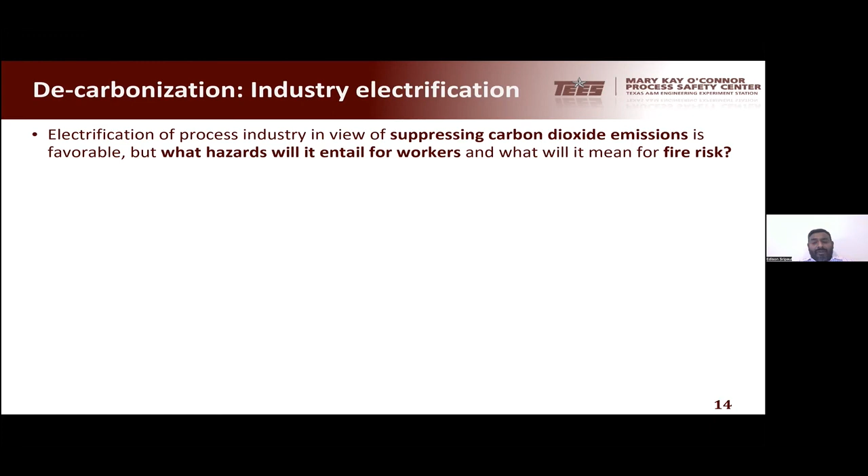But with that, we are also looking at the hazards that new workers have to deal with in terms of changing technology. Right now, we're looking at changing the process from electrifying the heating process, the cooling and compression, but also to stimulate the chemical reaction using plasma or existing electrochemical processes that need to be modernized.

In another aspect, we are looking at using process intensification and electrification as a two-pronged effort to minimize the impact of CO2 emissions, and that drives new processes. Electrification with process intensification is expected to change chemical processes such as catalysis by plasma technology, electron magneto-hydrodynamics, microwave, UV radiation, laser light, ultrasound, shock propulsion, and enhanced gravity.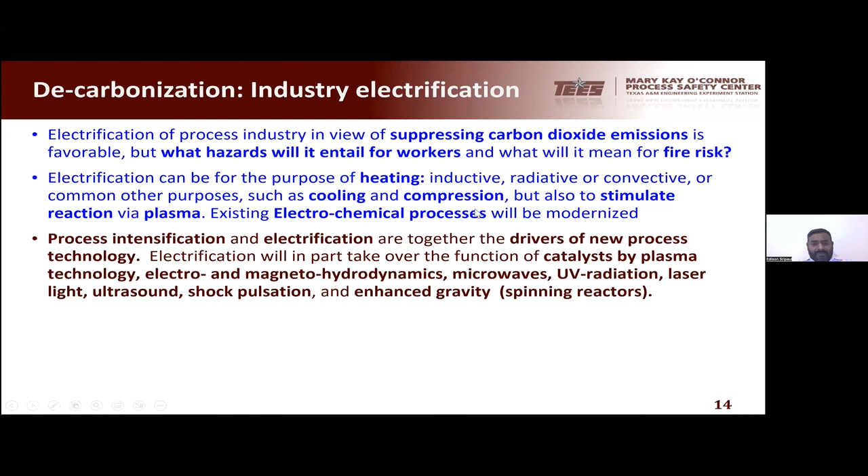These electricity stimulators generate ions and radicals and make use of ions to push those for flow by magnetically directing and forcing charged particles, or generate locally forced high energy temperature spots, providing activation.

So this is one of the processes we are trying to use to change the chemical process, to modernize it and make it electrical so that we're cutting down on emissions.

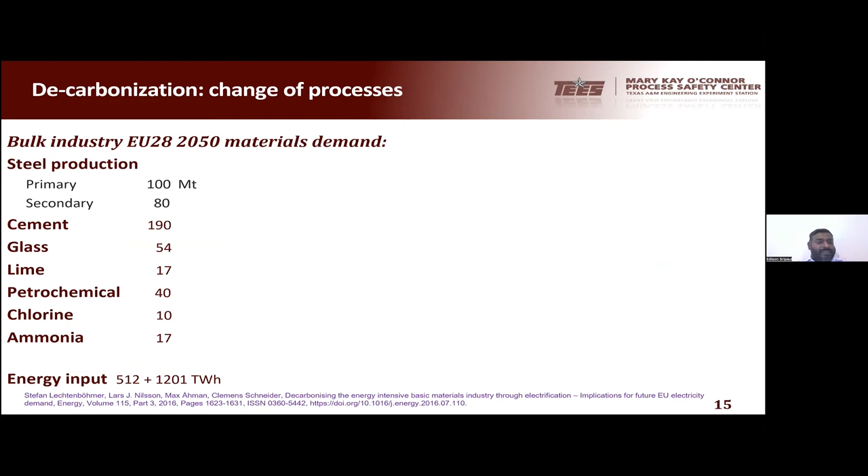If we look at it, some of the major industries really contributing to the CO2 impact are steel production and cement, which play a major part. Currently, we're looking at around 4,000 metric tons of CO2 emission from some of these major chemical processing plants. So if we want to change that in the next 20-30 years, by 2050 at least, we're looking at changing the whole fossil fuel processing to be charged using electricity.

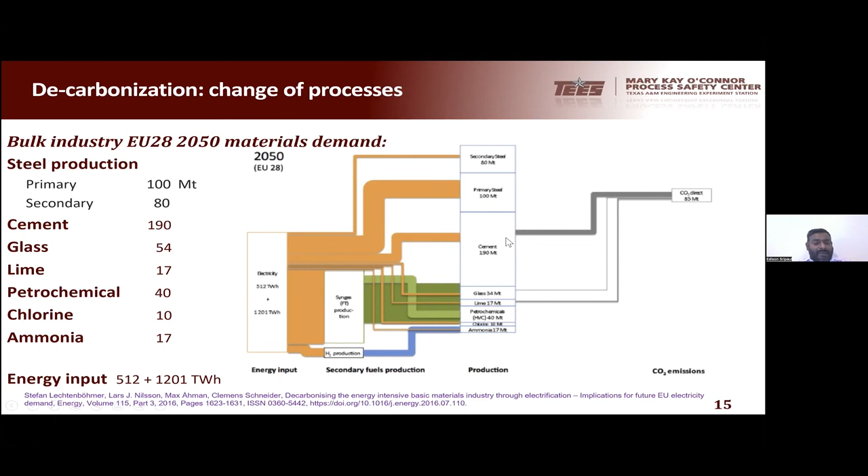We are looking at changing chemical processes using electrification. Some processes using intensified separations, plasma technology, microwave, ultrasound, and electric methods are going to change the way we process chemicals, enabling large volumes of chemicals and fuels, specialty chemicals, pharma supply chains, and bulk chemicals and fuels.

Processes like electrocatalysis, conversion, electrolysis, heating, upgrading, and electrocatalytic conversions are essentially going to play a major factor in electrochemical and chemical processes.

With this, we open a new set of safety hazards that need to be addressed. If we electrify the whole process industry, we're looking at unprecedented demand for high voltages and high currents. The current working environment is not trained enough to handle these large demands, and any mishap due to lack of technical and physical understanding may create new complexities that need to be trained for.

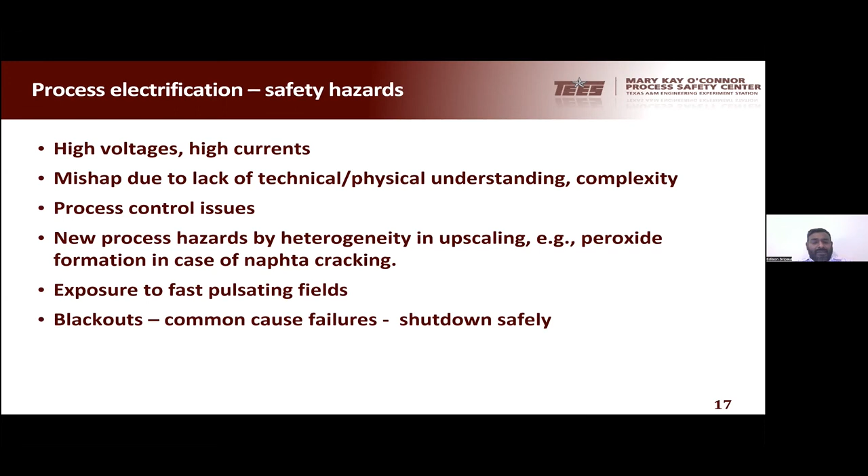Again, process control issues - conventional process control training has not addressed these things, nor the process hazards from heterogeneity in upscaling the whole process. For example, peroxide formation in naphtha cracking, exposure to fast pulsating fields, and the stress on the whole grid from electrifying the process industry could create new blackouts or common cause failures, and the whole idea of shutting down safely.

With this, we're looking at hydrogen and ammonia taking over as the new technologies of fuel for the common man. That popularization is also going to create or ask for new questions in terms of safety.

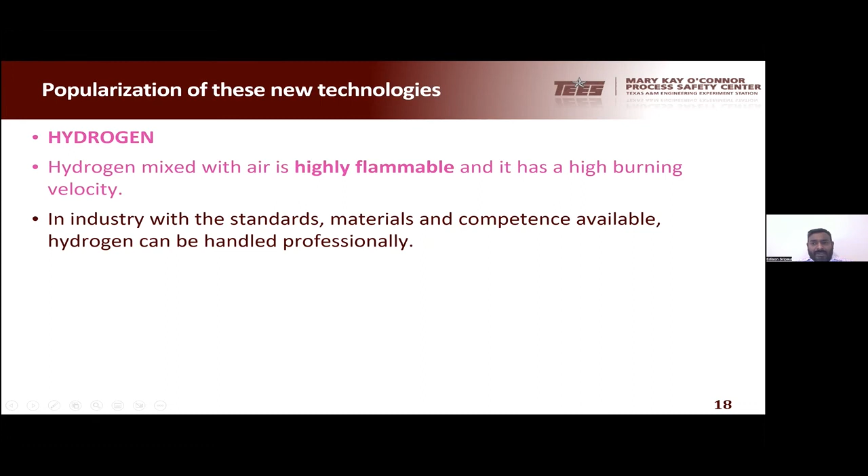As we've seen in past presentations, highly flammable hydrogen and its burning velocity, when it comes into high density areas like New Delhi, Mexico City, or Tokyo, we have to plan to ensure we can safely handle these things. The industry has standards and material competency available, but it's still an evolving process that needs to be addressed if we're going to be proactive about getting over to hydrogen.

Again, the big question is, if hydrogen becomes popular as the next fuel to power our cars, the safety in terms of dispensing it in high density living quarters or for fuel and electricity today is critical. We have seen natural gas explosions and catastrophes in high density areas, but hydrogen is expected to be more deadly than that. How we're going to manage that is something we need to deal with right now, rather than after an accident happens in the future.

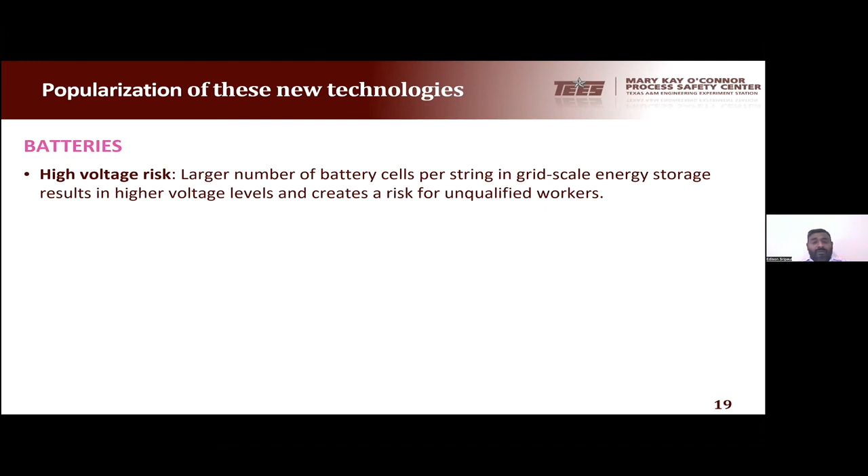Soon most cars are going to be running on batteries. The large number of battery cells per string in a grid scale energy storage system results in high voltage levels and creates risk for workers who are not qualified to handle this. Arc flash blast is another concern - high string voltage affects shock and arc flash blast potential, increasing the risk of injuries.

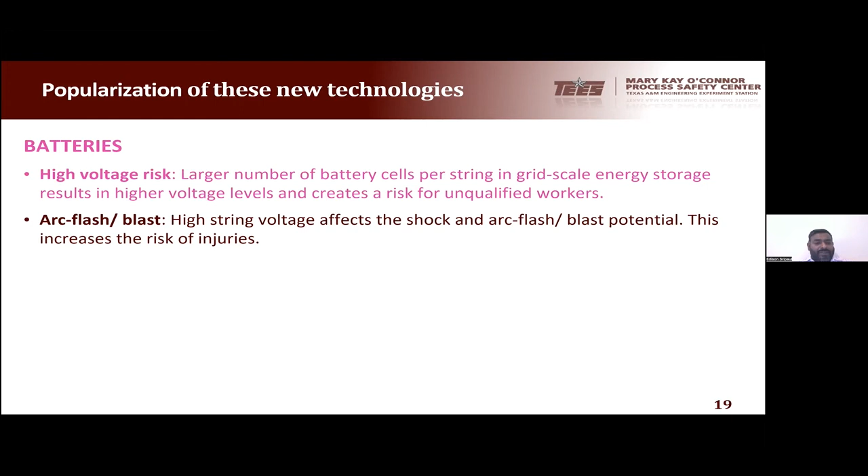Fire is something we are still learning how to handle with lithium-ion battery fires. This is commonly seen in the news, where fire protection agencies are not able to manage it, and there's no safety protocol for putting out these fires. Fires caused by dendrites or thermal runaway cannot be put out with conventional fire retardants. This needs to be addressed as we move to scales we have not seen so far.

As we scale to levels we haven't seen before, the toxicity of burning material is a concern - the electrolytes used in some flow batteries can be toxic to the environment and human population. Incidentally, the smoke generated from battery fires can also be toxic, which we have not studied very much about.

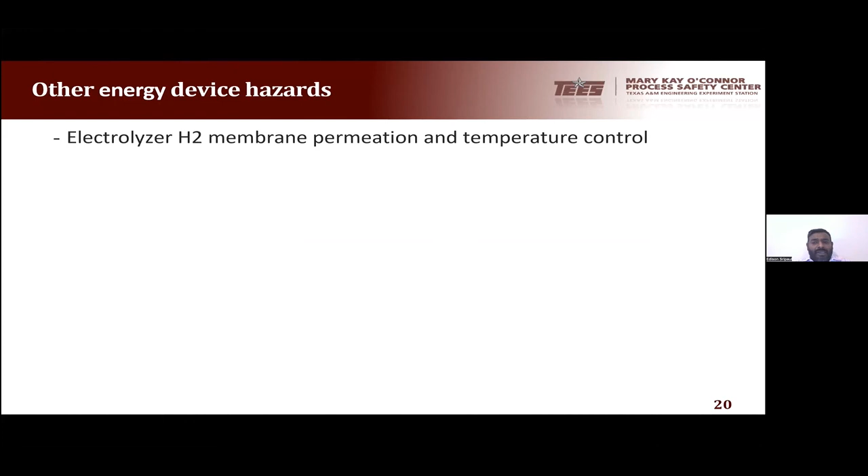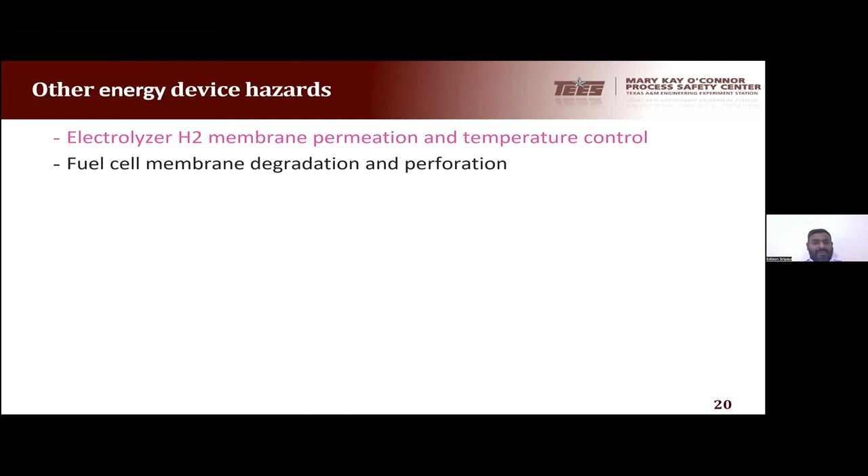So the electrolyzers, as we've seen in previous presentations, any membrane permeation results could contribute to a mixture of hydrogen and oxygen that could make it more catastrophic. And then the fuel cell membrane degradation and perforation needs to be addressed to ensure we are able to mitigate any safety hazards resulting from it.

Wind generators mainly face strong vibration and fatigue failures, accidents happening during transportation of heavy equipment, and issues with maintenance of generators under harsh conditions. So these are some other issues that need to be dealt with in terms of ensuring we are moving safely towards the new energy demand.

Material hazards is one thing that is largely not discussed as we enthusiastically look at new energy. The toxicity of uncommon compounds, dusts, and gases produced from use of new chemicals, and the flammability of new materials or existing ones that produce fine grains.

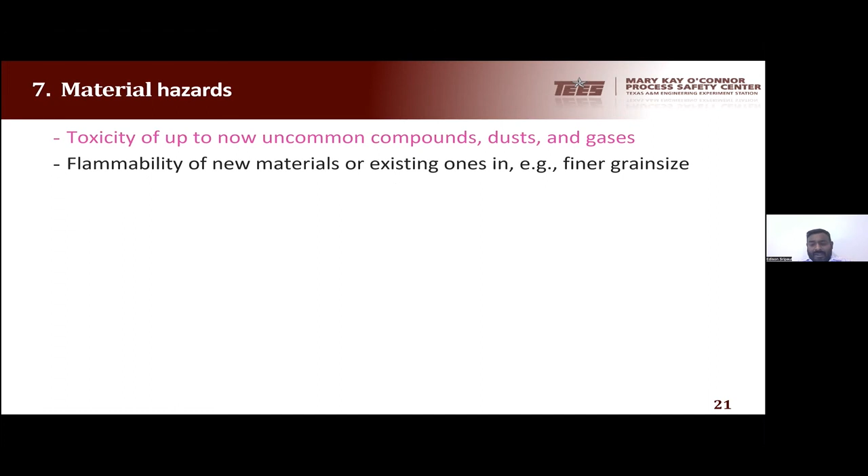So how do we recycle the lithium-ion batteries that are going to be coming out largely, at scales unprecedented in terms of matching the cars that are going to be coming out in the future?

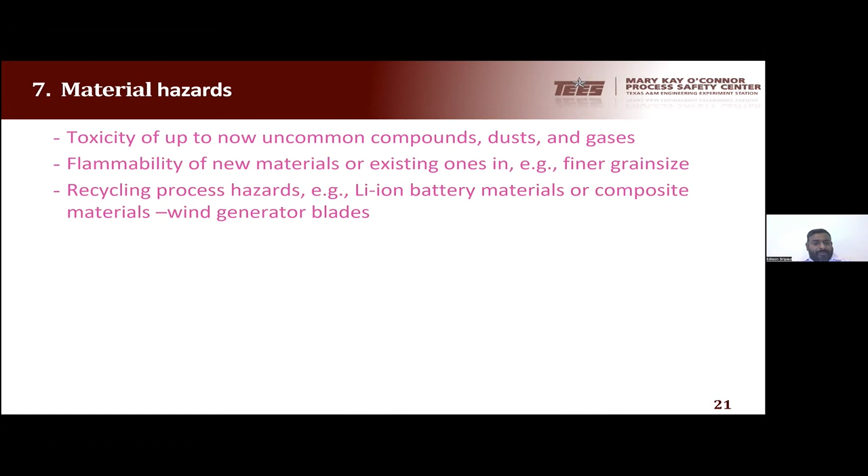So we've seen a large array of different aspects of the whole energy transition. With that, we want to address some questions as the world changes and conditions change. Know-how grows, new capabilities arise. With these new capabilities, we need to understand the challenges we face from new hazards and new risks that are not really understood at this point. This comes with new materials and new process types, the latter mostly to cut back on carbon emissions.

The large scale of operations and human factors are what make the risk serious, because up to now we have seen scales that we are able to manage, but as scales double and quadruple, how we are going to manage this is a big question.

Hazard identification and imagining scenarios are notoriously weak elements in risk assessments. There is some progress over the years, but too slow, only happening after an accident occurs. I think we need to address this right now, before understanding how to manage things once a serious accident happens. That is a big question that needs to be answered before we progress into the new energy transition.

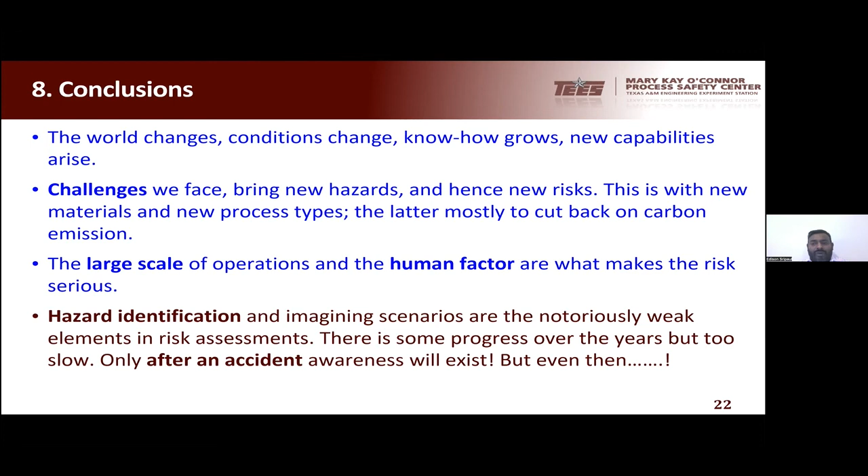So that brings us to the end of this presentation. And if there are any questions, we'll be happy to answer them.